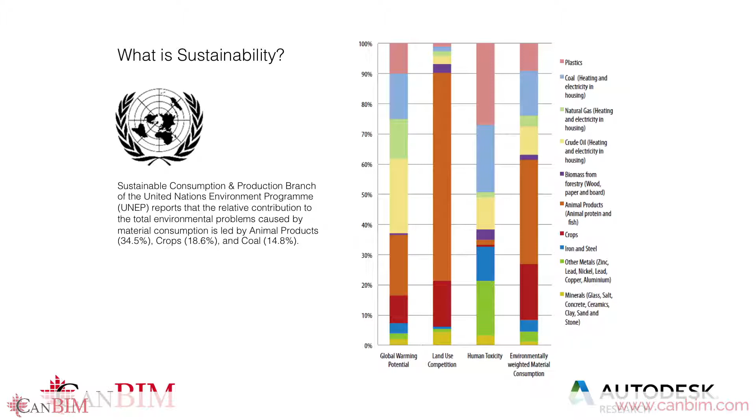This is from a massive report from the United Nations. It's like reading 3 PhDs, and they have the important factors there: global warming potential, land use competition, and human toxicity, and those are combined into their environmental cost to the planet. As you can see, it's dominated by animal products by a third, then crops and coal. Make no mistake, this is the problem, and we really need to address this.

And of course, a vegan Vancouver would be the biggest step we could make on that. We don't need to invent anything or think about anything or have any meetings. We could just do that. But in lieu of that, we have to move on to the other things where we can develop something.

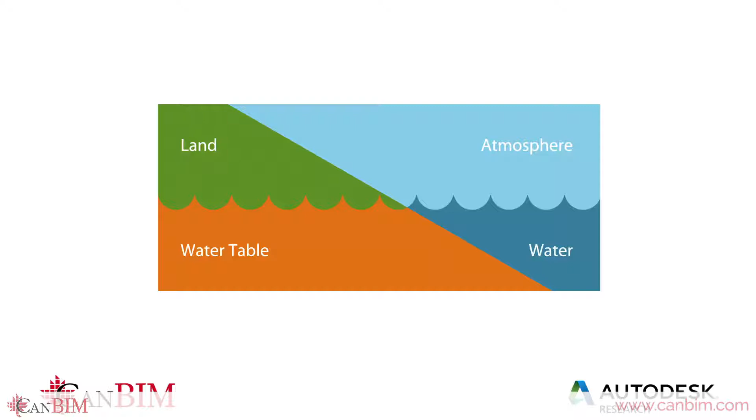Part of the confusion about sustainability is that typically we only talk about the atmosphere, the top right part. There are other parts of not just pollution but destruction of the other parts. If we zoom in just to that atmosphere part, where we talk about CO2 equivalents and so on, there's another complex system here, that's how I named my group, just about the atmosphere.

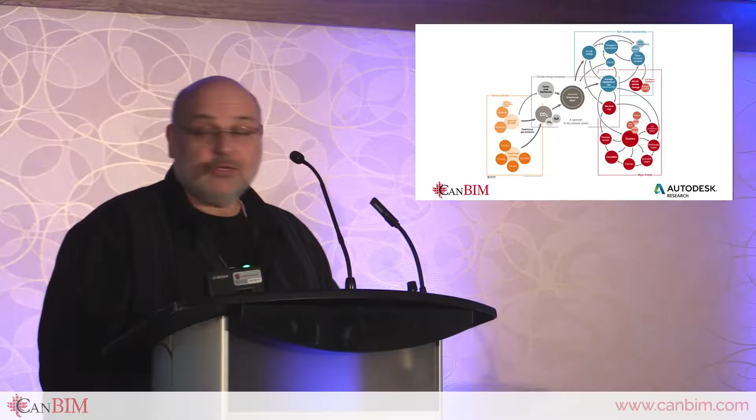This is from the same report, and you can see there are many interacting factors. The orange block is the human impact. If we drill into that a little more, I like to put up this question: what are the top 3 sustainability problems just in terms of the atmosphere, not all of the environment?

That was animal products. But if you look at the greenhouse gases, water vapor, CO2, methane, nitrous oxide, ozone, CFCs, the top 3, people typically think cars, right? Like, oh, I gotta walk to work and ride my bike. But of course, buildings are the number 1 problem in terms of the atmosphere. Animal products goes from, if you look at all the environment, from number 1 to number 2, and all of transportation, not just cars but planes, trains, ships, everything, is only 14%.

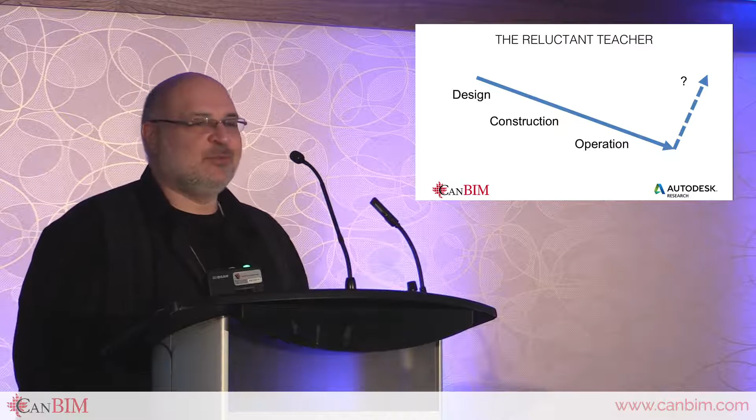Part of the teaching difficulty is that while we might have great design aspirations, as it goes through construction and by the time it's operating, typically the performance doesn't go up. Almost never are we surprised that our building works way better than we had planned. So the question is, how can we at least get back to zero? And then could we make further improvements beyond that? That itself is a complicated part.

And it only gets more complicated if we consider beyond continuous commissioning of the mechanical system, continuous improvement. The complexity rises, and not just on the outside of the building. This was our previous building in Toronto, the 210 King building, but also on the inside, of course, there's the mechanical, electrical, lighting systems.

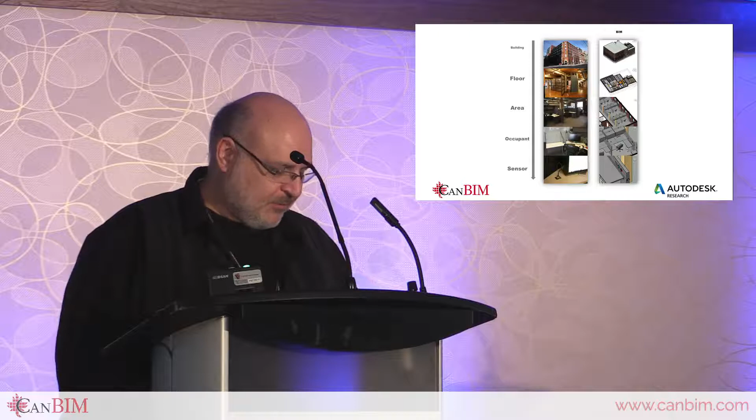These are all their own complex systems, and not just at the whole building scale, but at every scale. This is some sensor work we did in a project documented on a website called digital210king.org, where we put all the files, laser scans of the building, everything is there. And if we get down to the bottom scale, this is a slide recently given to me by Cliff Harvey.

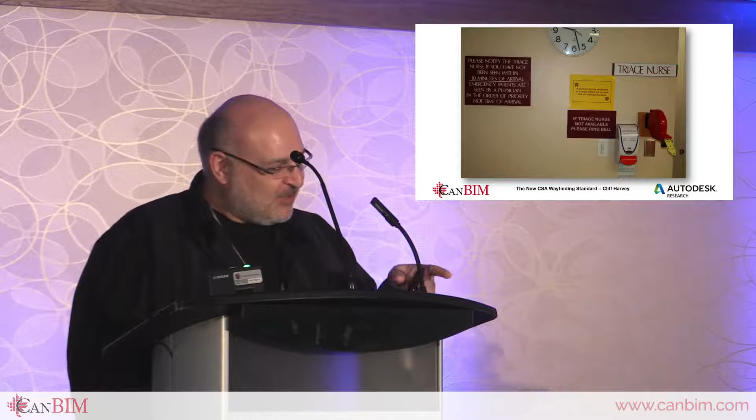In terms of how buildings learn, if you look at some of these signs, it's kind of crazy in this hospital, where it says if you haven't been seen within 30 minutes of arrival, that's probably why the clock is there. People are treated in order of priority, not time of arrival. Yet there's a ticket sign that means your number is called in order, not priority. If the triage nurse is not available, please ring the bell. There's a little doorbell there. But then the triage nurse sign, I guess the nurse is supposed to stand there, and the little yellow sign says go to the designated area. Like, I wonder where that could be.

So yeah, that problem exists at every scale.

So what I'd like to propose, as sort of my 20-year plan for sustainability, is that we move towards a software development model. How many people have seen the V model? Validation, verification. It's something we use in software development, especially in critical systems like nuclear power plants or airplane control systems, and so on. There are a few good examples of this.

This is just off the internet, off the Wikipedia page, and it can map to AEC—architecture, engineering, construction, and operations—along the three axes there. The interesting thing in these diagrams is how far along do we get in AEC? I'd claim we only get past verification. We answer questions like, do the individual building modules behave as per the design? Does the integrated system behave as per the overall design? But we're missing the blue parts.

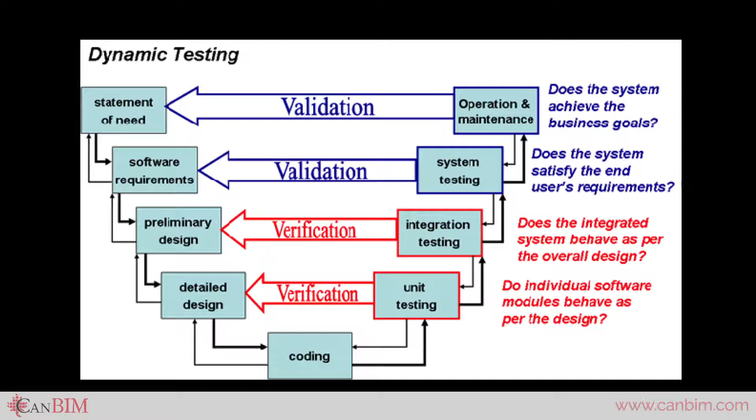So my two teams have been thinking about this and how to address these things, to really see if a system meets the needs.

To open that black box, I propose that we have, as we do in software, a debugger. Software is very complicated, insanely complicated. You're going to have millions of lines of code, and by definition each line is supposed to be unique, because if you have redundancy, you make a function and call that.

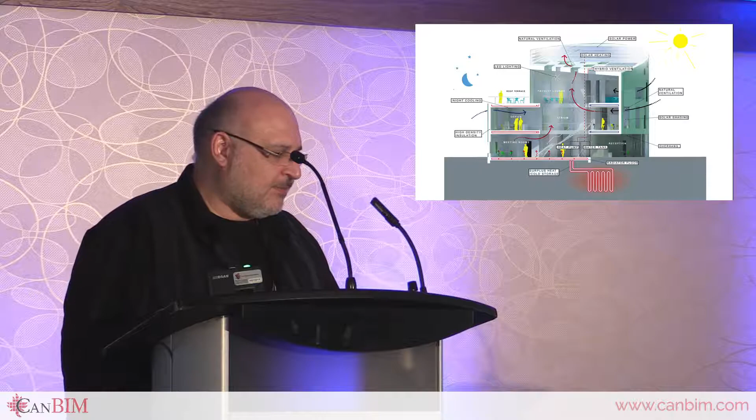I was inspired by this picture from around 2009, a building on the University of Copenhagen campus called the Green Lighthouse. I thought, this really shows me how the building works. Could I have something based on the building information model that can convey this kind of information?

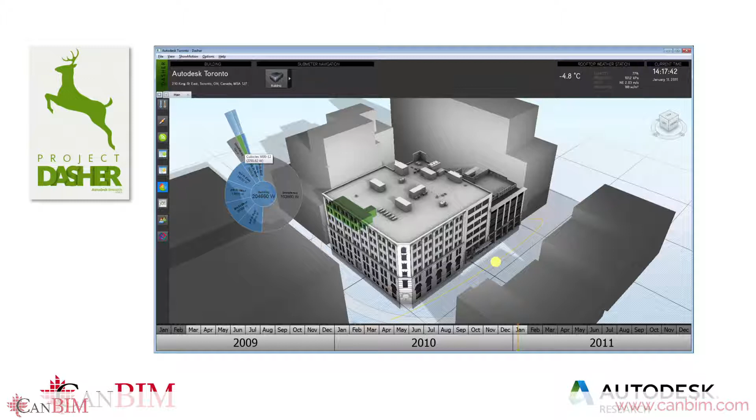So in 2010, we showed Dasher, a building dashboard that was our first step towards that. There's a number of features in there, and we worked on that for quite a while, and we built a detailed model of our building.

This is sort of an as-built model of our heritage building. It's a best case, worst case scenario, because it's 4 old buildings stuck together, each with their own quirks. They're not even all aligned, and having a single ground plane is difficult. So it was a good learning experience—this is how we learned Revit.

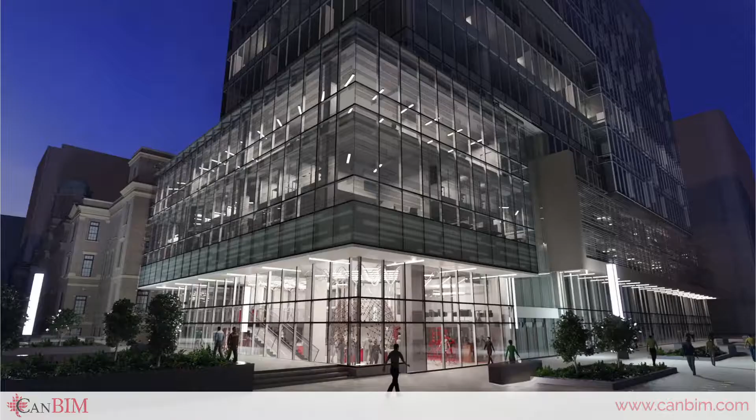Now we've moved into our new building in the MaRS Centre, the Discovery District, and I'm super happy to be there. This is a great ecosystem, and if you're in Toronto, I welcome you to come by—just bug me, and I'm happy to show you around.

Of course, we're running Dasher in the new office as well. We're just starting with this, so I don't have too much information yet. When we plugged into the building control system, 700 sensors showed up, so that's a good start. But as with most projects, half of it seemed to be from another tenant, so there's a debugging part itself. That reveals the thing about Dasher: once you start looking at the data, that's the only way you can actually figure out what's going on.

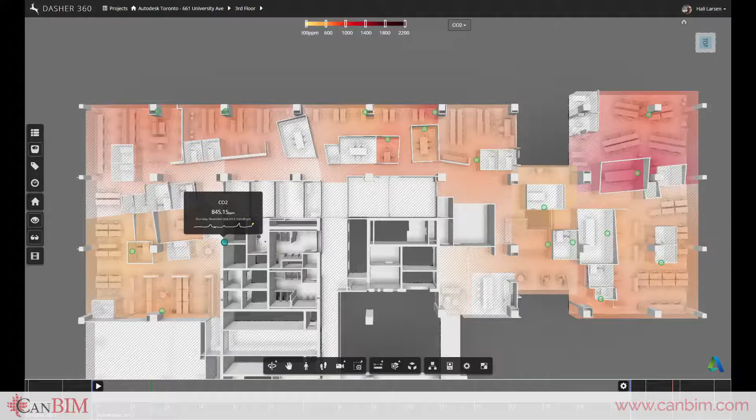Here's a top view—I think this is the CO2 data from the CO2 sensors that are just part of the building control system. We didn't add any sensors to this building yet. And here's a short video of our old building. Hopefully this is playing.

Or not. Oh, now it's playing. Almost. There we go, the other play button. Not playing. Well, it was extremely cool. You would have loved it.

Okay, we'll just move on. This one's playing a little better, hopefully for you.

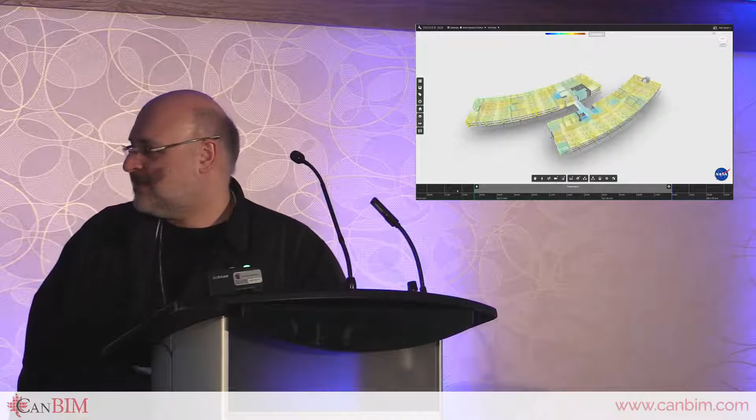This is the NASA Sustainability Base in California, and they have a really good density as a smart building or a living lab building as well. They continuously try to improve their sensor types and layout, and this also reveals interesting things.

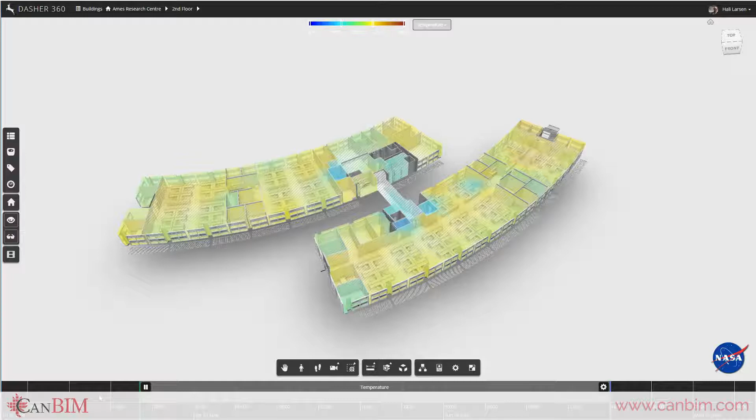The bottom right corner of the building, that was interesting for them. They were wondering, why is it having that response? And they remembered, oh, that's the room where we put some special glazing as an experiment, and so they could see it in the data.

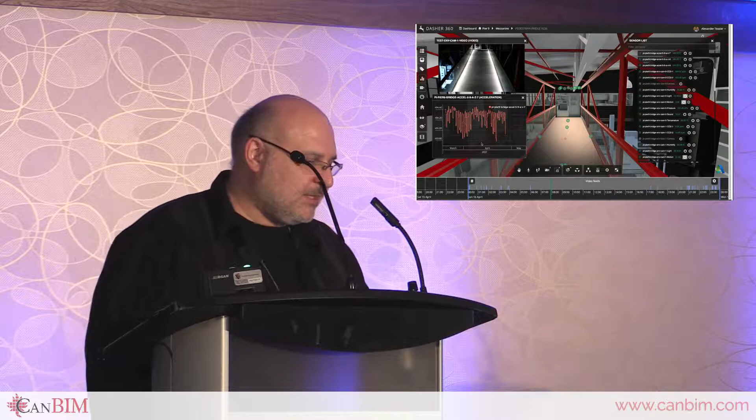This is our Pier 9 facility in San Francisco, where we also added cameras and some machine learning to look for occupant events. On the blue timeline at the bottom, we're doing some computer vision analysis to find out when something interesting is happening on the bridge. And we can synchronize that with all of the other sensors to look for events.

This is part of a little mini infrastructure project that we're playing around with, mostly to investigate the computer vision possibilities. In construction, last August, we started working with a few companies.

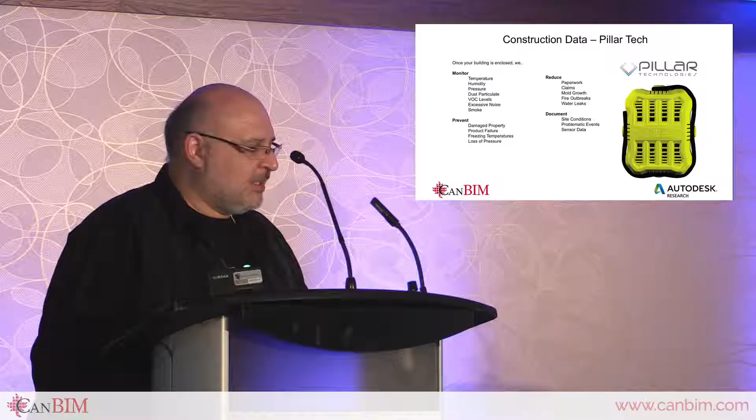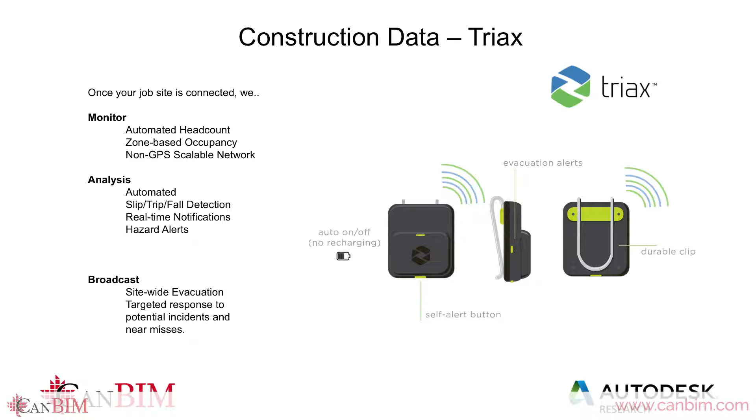Pillar Tech, this is a sensor box that you can strap onto a pillar to see what's going on in your site before those kinds of sensors are physically installed. Triax is a sensor worn by the workers. It can detect slips and falls, but also you can sound an evacuation alert and see which zone somebody's in.

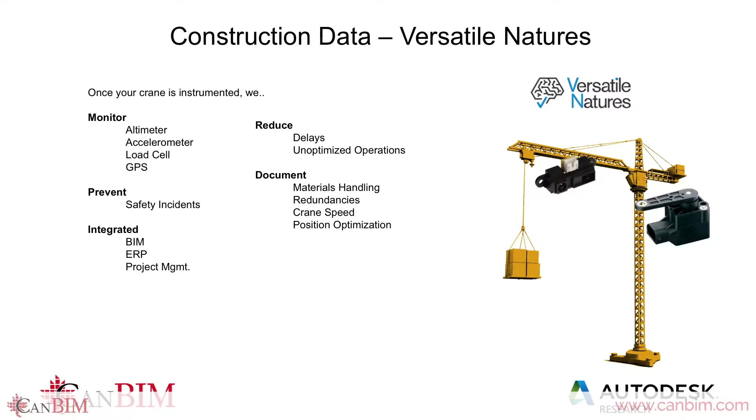And then Versatile Natures, this is a company that's tracking the crane as well. We put it all together, also in Dasher, to visualize what's happening on the construction site. So it's interesting that the things we did for operations and seeing how the building works can also be used in helping during construction time.

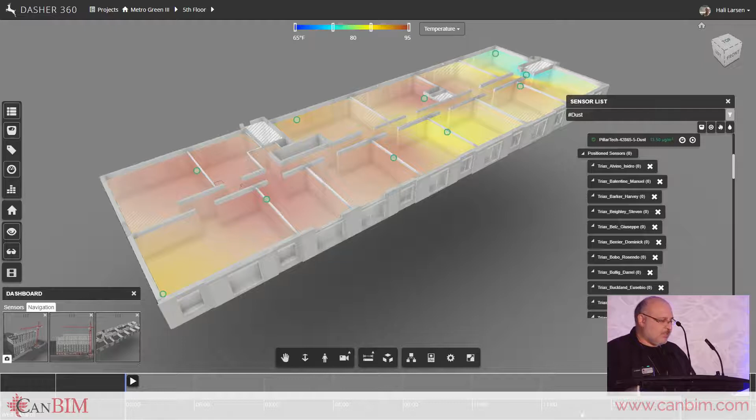There's many more things that we can do here. This is just our first steps into construction tracking. Well, actually, we have a few more things.

I don't know if you're familiar with phasing in BIM, in Revit. You can have these different construction phases. We can also visualize that construction process going on.

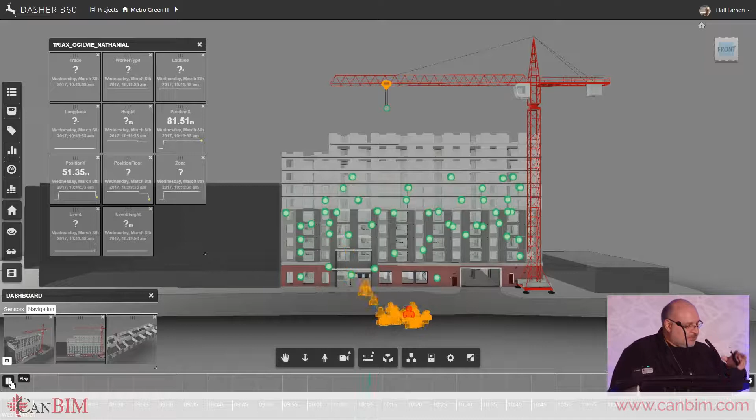I should have been narrating here. This is the people leaving when an evacuation button has been called. There's a zone on each floor and then 3 zones across the floor plate.

And finally the crane data. So the first data that you saw, that was the Pillar Tech data. And it also reveals, I was wondering, why is it doing that crazy thing, the crane? And it's because we're missing the context. This is where I'd like the cameras now to see, oh, it was avoiding some other obstacle, or maybe there's another crane there that we're not tracking, things like that.

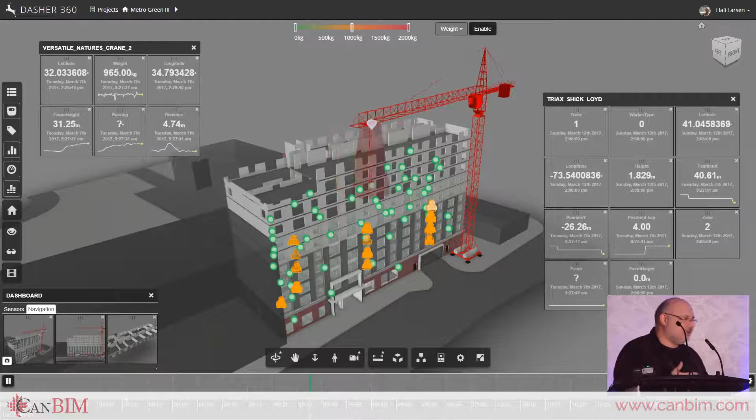So by looking at the actual data, before even doing any machine learning or any interpretation, this kind of tool can help you understand whether your data is good to start with.

And then the second part is the validation part. This is the missing step, I think, in most projects, where it's hard for us to go back and talk to the end user, the occupants, and even more high level than that, the actual business goals of the stakeholders, which also, of course, change over time. And this is where we can include sustainability in these two parts as well.

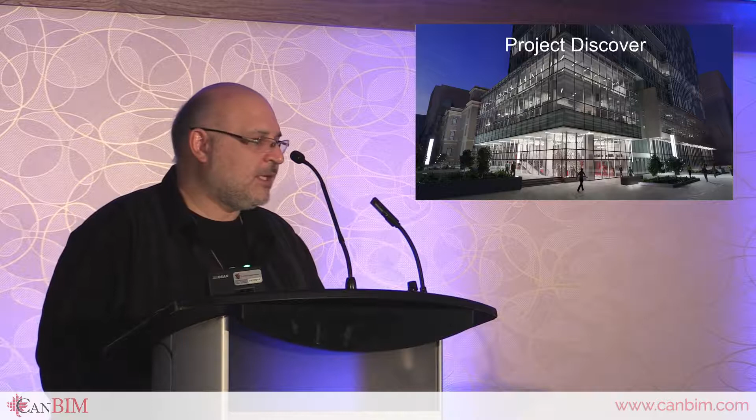So the next part of the talk is Project Discover. This is the name of our project for generative design in construction, in AEC. And this is the process that we developed for designing our new office in Toronto.

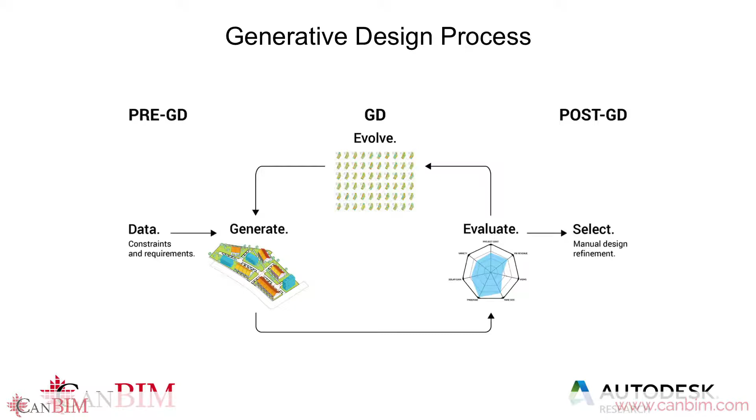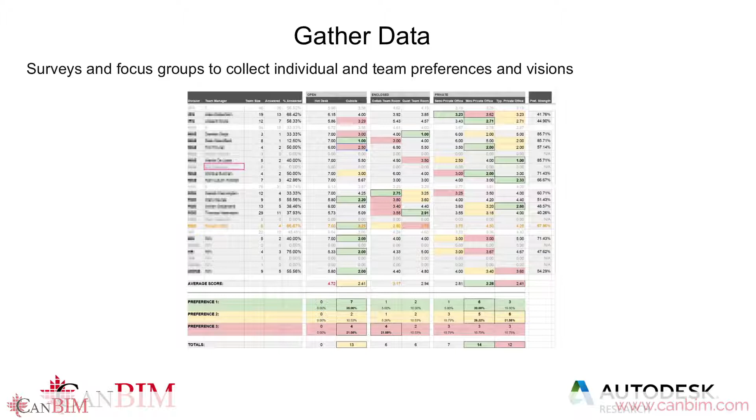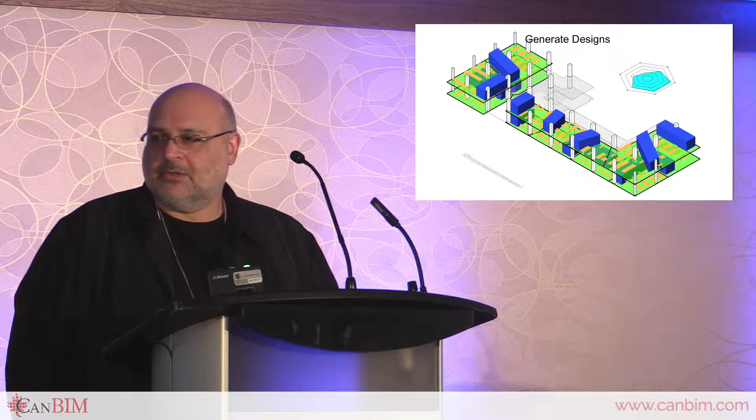The generative design process is sort of a level above our current practice, where we try to describe the project in more abstract rules, constraints, and goals. By doing that, we can look at how we generate a BIM or generate the design, based on these higher level things, similar to what Mark was showing this morning.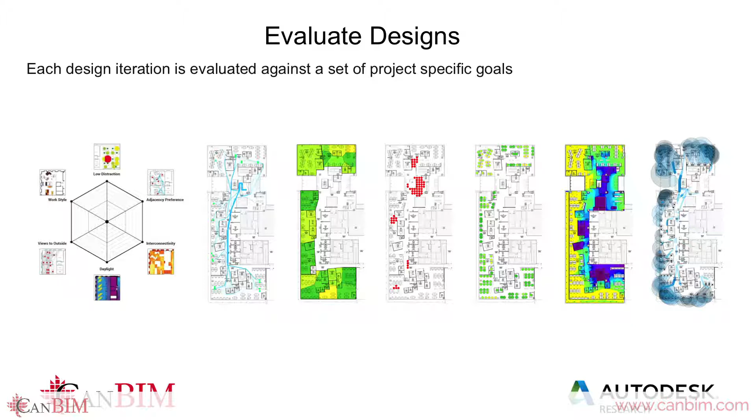Through different optimization methods, we can evolve the design and have an optimization search through the design space to find the candidates. We evaluate all of those designs based on our set of metrics, goals, and constraints that we set up, then select one, refine it, and build it.

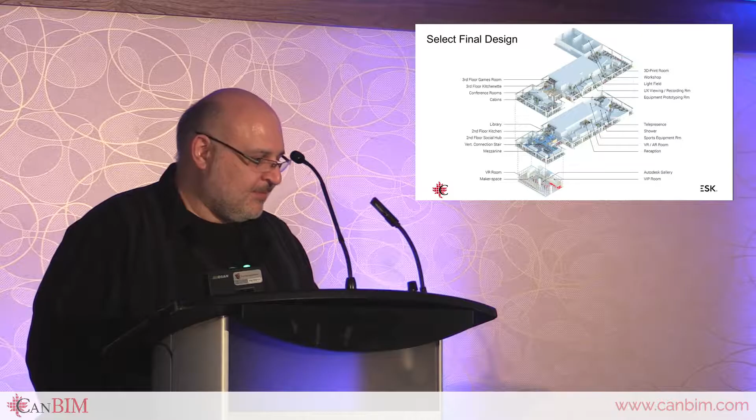The process started with gathering data. We're in the unique position that we already know who's going to be in the building. We know exactly who they are, and we can ask them: who do you work with? What kind of work style do you like? Light or dark, active or quiet, and things like that.

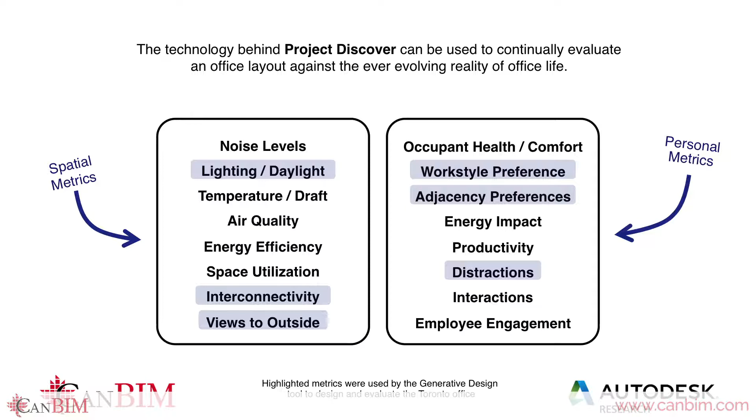We can overlay the org chart and say managers should sit with their team when we generate a floor plan. We can ask managers which teams collaborate and which should be close to each other, and ask individuals and teams which services they want to be close to, like the workshop, the entrance, or the kitchen.

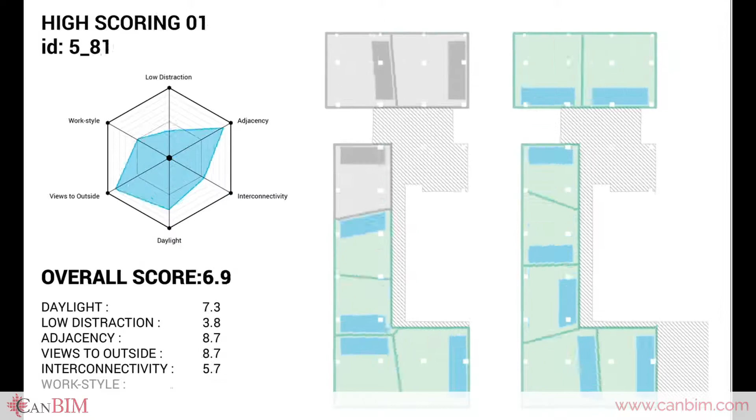Then we can develop a number of systems. In this case, this was our neighborhood metaphor system, and we can just generate lots of designs. The little spiderweb thing there shows how well each design performs on those different metrics.

We have low distraction, adjacency, interconnectivity, daylight, views to the outside, and work style. Daylight is the only sort of traditional simulation we're doing there. The thing that makes this fun for me is that we're taking these traditional fuzzy concepts and trying to encode them into the system.

That's why it's called Project Discover, to help us discover things we wouldn't otherwise. This kind of started because in one of the early meetings, people were talking about things like, well, we should be close to this, and that guy should be close to them. I stood up and said, we need to write some software. This is unmanageable.

In this project, we ended up with 6 goals and constraints. Each one has a visualization, so we can understand how it's working, and each one scores a specific design. The system generates a design based on the parameters given to it from the optimizer, and then we evaluate that design on how well it performs.

We evolve the design and generate lots of things. This is a genetic algorithm, so some are selected in each generation and they're mutated into further designs. This is the one we selected finally, and then we built it.

Again, I welcome you to come by and see the office. It's interesting to go around the office and see the different neighborhoods and see how some of their selections are reflected in the office.

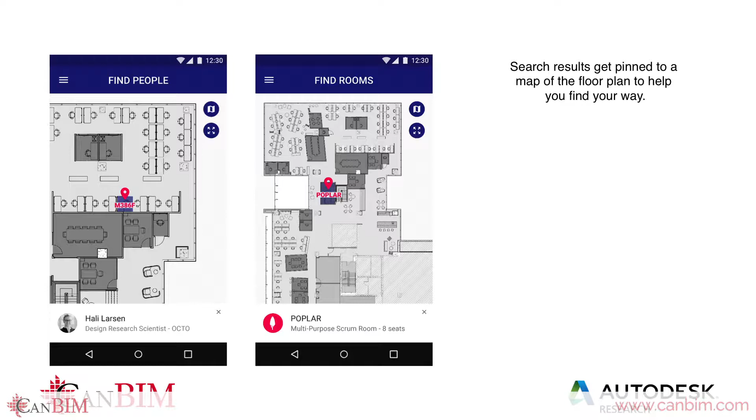We want to make it useful for other purposes too, taking advantage of the fact that we have a building information model, so we can include booking rooms, showing schedules, and showing a map of locations. This is the same Revit model we've reused in our Forge viewer, so we can show the floor plan here and put the desks. We've overlaid this with our org chart, and we use Workday for our HR system and things like that.

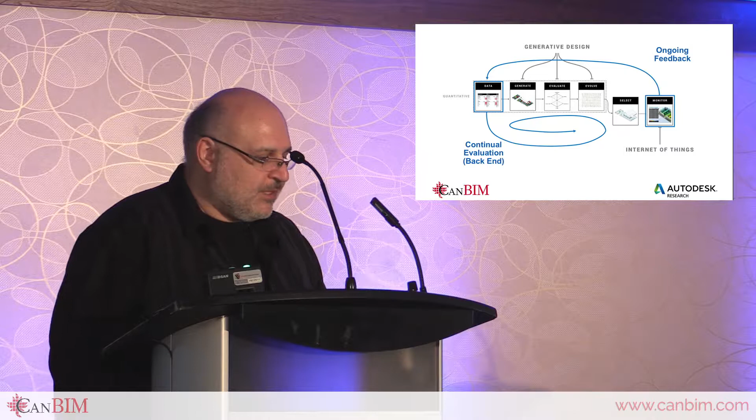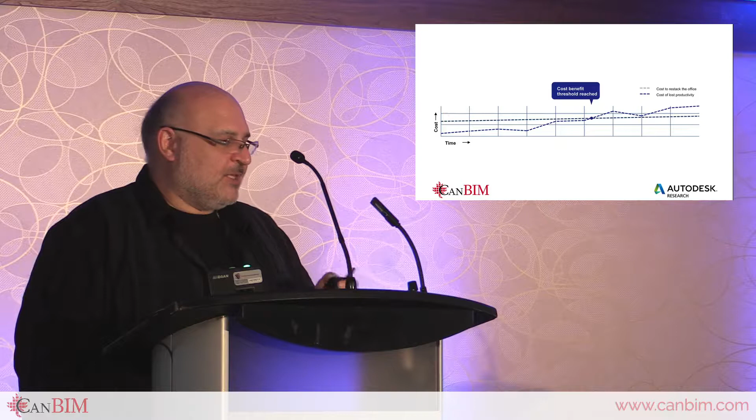Talking to Brad earlier, I was saying the example of a variable speed pump, so these have a higher cost than the old ones. It would be great if you could have some system that told you now it's actually worth it for you to install this device. It would cost this much, but we could hook that up to a green financing company as well, and they could say it won't actually even cost you anything, and they'll share in the profits and so on.

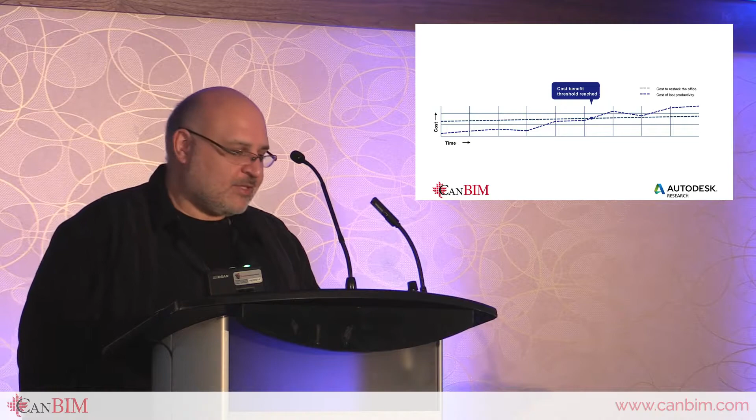So hopefully I've shown you the two parts that are part of my vision, to have buildings teach us how to make them better so that we can integrate both real quantitative and qualitative data to make sure that we don't end up with what we had before in our old office and what many offices have, which is just a building that everybody dislikes. So hopefully we're moving in the right direction.